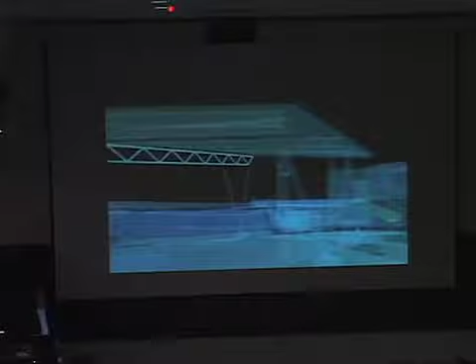This was an animation that we built in 1984. It was for the North Carolina Museum of Art. It was very, very early, at the beginning of computers, and actually takes you through a project that we later built. But I want you to notice that the actual film is mapped on the surface of the projection screen in North Carolina.

See, this is too complicated for me. Gotta go here.

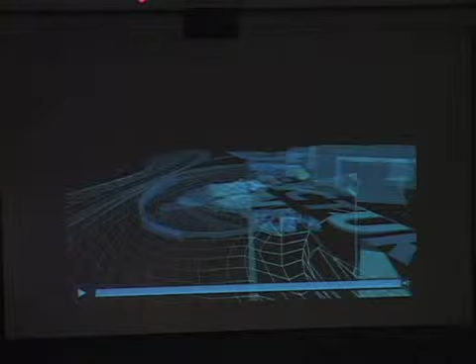Our office is downtown in Soho. We understand it to be a studio for the investigation of architectural design and production. The plus sign added to our initials, SMH for Smith Miller plus Hawkinson, purposely alludes to the collaborative nature of our practice. Our studio is a long and narrow loft, actually once two buildings, built just after the Civil War and joined sometime in the 30s.

The open plan supports all sorts of activities: model building, full-scale mock-ups, conferences, and solitary work. There are 3 libraries: theory and history, product research, and publications relating to our work.

I've got to figure out how to make this thing work here.

We thought to categorize our work in terms of human endeavors, as in live and work, work and learn, and play and connect.

Under live, I present West 53rd Street. I saw some work that dealt with housing today. It was very interesting. A low-rise, high-density, multi-unit condominium in Midtown. Our house at Sagaponack, a not-so-typical suburban single-family house, and 2 projects for historic landmarks districts: an ex-urban house for a famous architectural theorist, Ken Frampton, and 2 loft interiors.

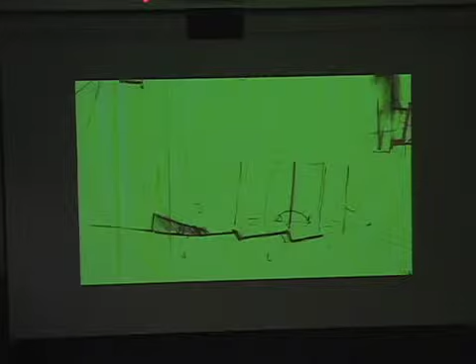This is kind of interesting. I'm going to get off the computer and start looking at the slides.

Basically, we were looking at housing in the city of New York, and we discovered that there was a precedent in the form of the Brooklyn townhouse with a grand stair, we call it a brownstone. The stair goes up the main floor, but we noticed there was a second type, where the building was recessed from the street, and there was a courtyard in front. Later, in the Upper East Side, we discovered that some of those types had been modified to remove the grand stair, but the sort of courtyard remained in front.

And then we found Philip Johnson at work doing a virtual courtyard. That is a completely flat facade with a brick wall and a wooden door that actually enters directly into a two-story townhouse. On the other side, the back side, where the garden is, actually it's the same arrangement, but he flattened the facade.

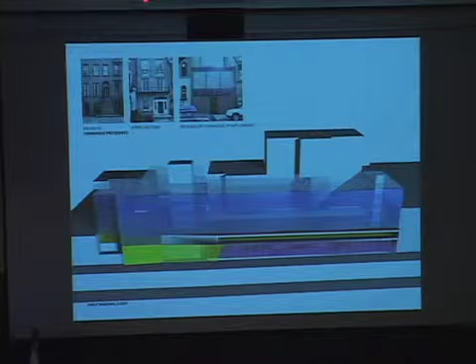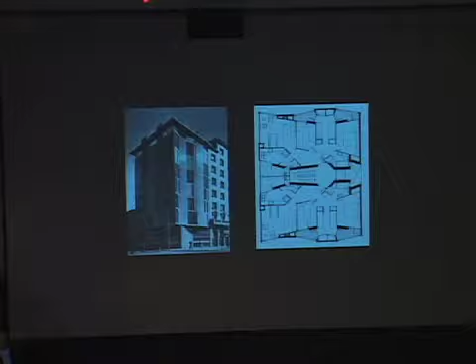In this building we used a glass wall to do similar things. Wait, hold on, I've got to do something here and there.

So we made all our own kinds of animations to describe the effect of walking down the street and seeing how the actual building would appear from north, south, east, and west.

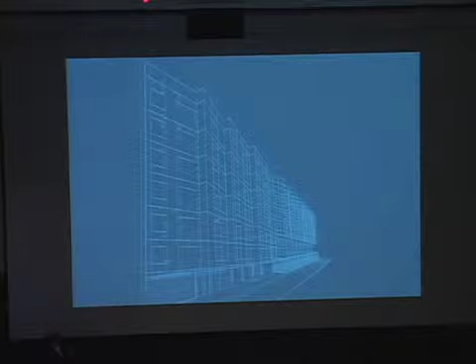Early wireframe perspective shows some very interesting beginnings. This is the folded facade, kind of like Aalto's work. At the bottom you can see the townhouses or maisonettes are pushed into the building with a ground floor of courtyards and spaces. There's a main entrance here for cars, shared, and also for people coming into the apartment tower.

In the model, we began to look at this as a kind of screen. We were trying to figure out what to do with the ground floor, because there was no precedent for that in New York City.

These diagrams attempt to identify the simplex tower and the maisonettes, which have duplexes that run through, plugged together like this. We found there was a tremendous variety of units within this 6 or 7 story high building.

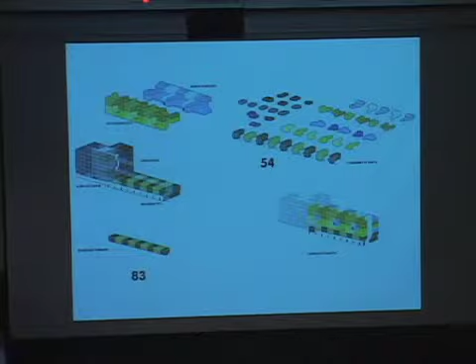This is one of my favorite drawings—please don't look at the people. Basically, there's an entrance at grade. This is the maisonette that runs to a rear yard garden. Downstairs is parking, so when you come in, you go upstairs to your maisonette and the bedrooms.

The key thing is we managed, in a 7-story building, to have only 2 common corridors. These are the famous skip-stop corridors, where you come in off the corridor, go upstairs to a bedroom floor that runs all the way through, and vice versa. So I don't pretend to be a green architect, but this building actually has cross ventilation on every floor, and it's incredibly efficient.

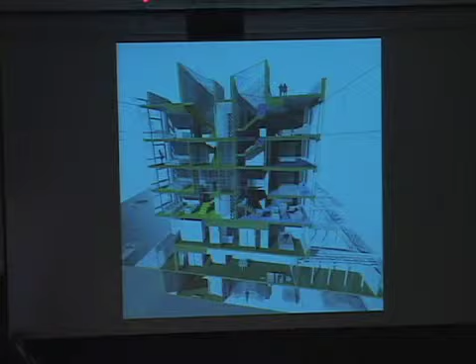This is my favorite thing, but I've got to figure out how to make it work.

The marketing people decided to try to unpack our building, so they made an animation of all these pieces coming apart. It was never really finished because they realized it probably wouldn't be understood very well by the public that was going to buy the building.

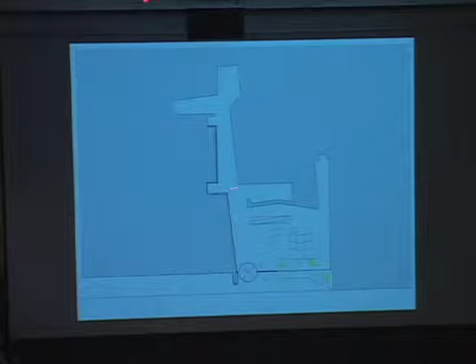The interior is important to us. This is actually the lobby, and you'll notice that all the oblique surfaces make it very hard to understand how deep or how wide or the real size of the space you're in. It produces a kind of slipping and sliding that gives tremendous animation to the volume of the space.

It was in Architectural Record. We just put these up because you can see that the bedrooms are joined—the bedroom joins the living room behind this common skin.

The other item was, I was very concerned about people occupying residential buildings in New York City, and these are actually square parallel-projected sash windows that are opened by the individuals in the building, which animates the facade much like in a pixelated fashion to give it life.

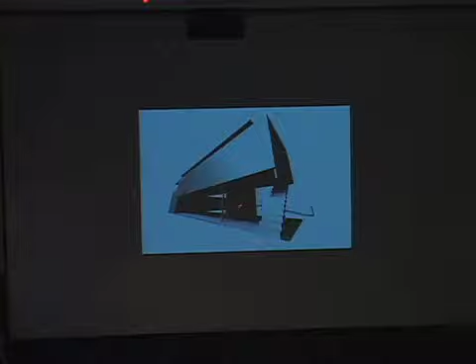Actually, it's a deconstructed house with stairs going up to the roof. There's a little piece of roof here, a big window, and so on. Well, we were thinking in similar terms of having a stair, a solid wall to protect you from the street.

And other aspects of this house as a kind of deconstructed dwelling. In fact, from the street, the bedrooms, which are behind this wall, there's a corridor, have no view to the south. They pick up skylights. There is a common room upstairs where the owner has a study, so he or she can look down at the front yard. And oh yes, there's this weird courtyard and wall which protects the interior court from being seen from the street.

The project reverses itself and becomes almost all glass into the courtyard, which has a swimming pool. And the glass upstairs actually is full height from the bedrooms. There is a balcony out here that obscures the view as you're looking up. So just as the spandrel worked on the 53rd Street project, we're using architectural elements to condition the windows.

We were asked to do a very small building made out of brick for a developer in a historic landmark district.

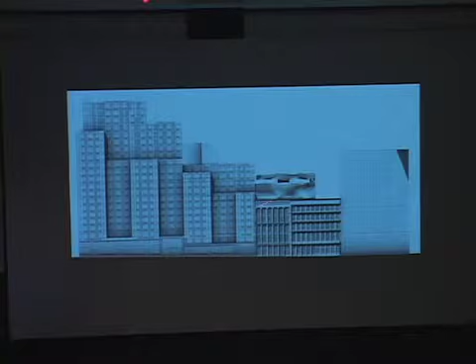And we had a commission. This guy owned 1.5 buildings on Leonard Street, right next to the Herzog and de Meuron Tower that got stopped. And so he realized that by code he could put more building volume on top of this building. So I had this really interesting problem of proportion and scale.

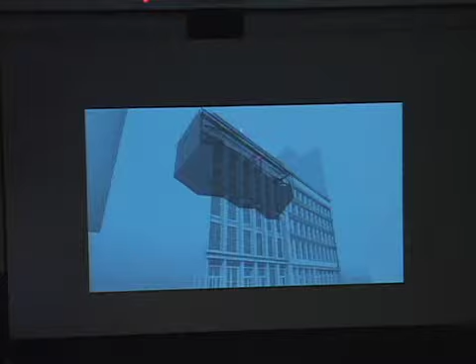We began to think about how we had to make drawings that showed you how much you would see from the street, because the Landmarks Commission thinks about that. So we made drawings where actually the new addition is sitting right on top and is transparent, and you can see both at the same time.

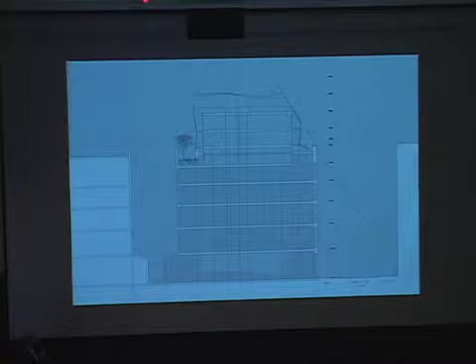We discovered that there was another part of the law which allows people to have balconies and escape routes that are not considered building volume, but can be inhabited. And so this became a kind of scrim that wrapped around the top of the building and the sides. It formed a kind of rock when you looked at it from the street.

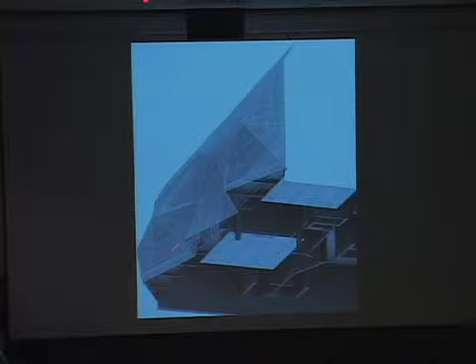We began to study folded screens to see about relative densities, and then finally came up with a scheme. This is looking up through the bottom of the apartment and seeing these spaces. This is its final portrait. It was approved 100% by the City of New York and not built.

And there was a house actually down on the right over here that we didn't like, so Ken and I took a large ladder and put it on the site. I held the ladder and he got up high and he decided where we should put the house exactly.

Speculative projects and urban design. This is a neoclassical, actually 1927 brick building, and we were asked to build a tower on top of it. This is what it looks like.

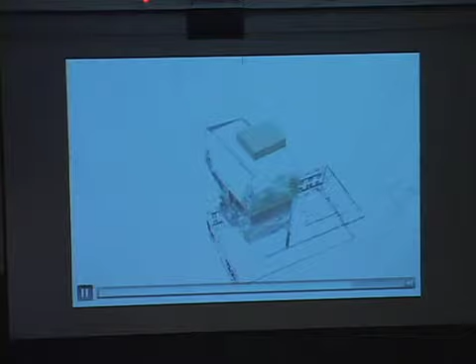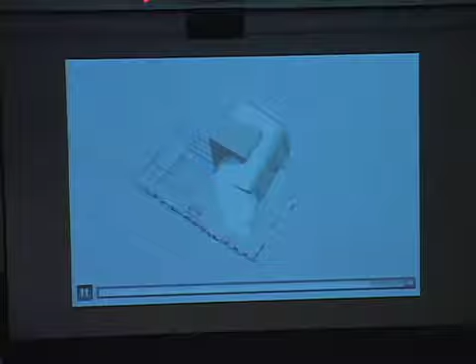As you can see in this detailed animation, the building only exists in its reflection, and the rest of the city isn't there at all, is it? So we temper our presentation to match our theoretical premise, and actually we do that with real buildings.

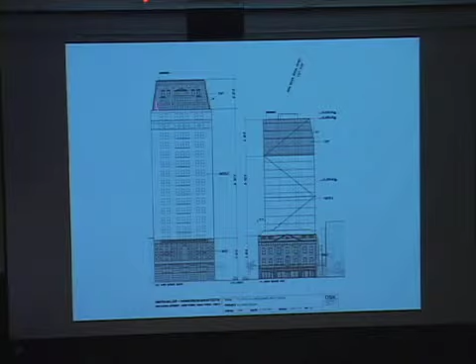Proportion. This is the neighboring building, the W Hotel. We found all kinds of remarkable similarities between the existing neoclassical building and our reinterpretation.

In Soho, we completed a whole building from the ground up, only to have it stop because of the economy. It was very tall. We've done work in Telluride, Colorado, and worked in different places under different situations.

This is a project on the East River, part of which has been built. The actual drawing is an addition to the top of an existing hospital and a physician's tower on top of the FDR Drive.

One of the things I was keenly interested in is the kind of architecture that goes on at the edge of the city island and the large span that happens, for example, at the Queensboro Bridge, which also happens with regard to our addition.

So I brought this kind of very large architectural effort to go across the FDR Drive with bridges and so on.

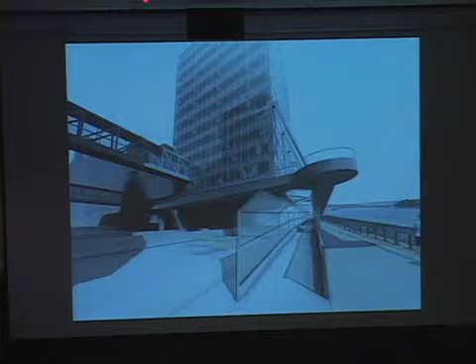The skin of this building, because it was facing east, we worked with Buro Happold to make sure—having spent 3 days in this hospital having my hips fixed, I was keenly aware of what happens at 4:30 in the morning when the sun comes up in your eyes. So I put a scrim on the outside of the building to mediate the east sun in the morning.

This is the project as it will be completed. This is an existing building, and this is an addition. Basically, we weren't allowed to cross the street.

As Amanda Burden is very interested in keeping the streets open to the rivers, we carried the frieze or the cornice across the top and down the side and over.

Fortunately, in the existing plan, this was what we call a skin job. Somebody else had already done the plan of the building. They hired us to get by the planning commission. So by maintaining a kind of continuity across both buildings, we actually bridged the street.

Corning—some of you have been there. This is actually a project that's more about looking from the inside to the outside. We thought the landscape was actually part of the exhibit. There are lots of luscious materials.

In this case, we had a big shutter at the end of the theater that went up and down, so as people went up the ramp and came down and got ready to watch the film, the next group of people ready to go in would see those other people going in, and the audience, actor reversal would take place.

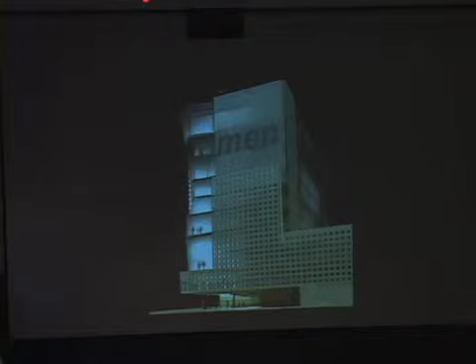In Lower Manhattan, we won an international competition for a women's museum. We're very interested actually in the relationship of what portion of our site actually was visible by Lady Liberty.

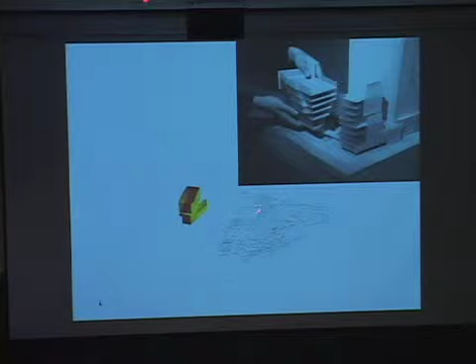And we found a volume within the building site where all those rooms would be united or tied to the Statue of Liberty. Needless to say, that project didn't go ahead either.

This is in North Carolina. This is where we actually put culture on the outside of a building. We made an amphitheater, a performing arts space that mirrored the Eurocentric European collection that was inside the Ed Stone building. Tom Phifer has since made an addition to that.

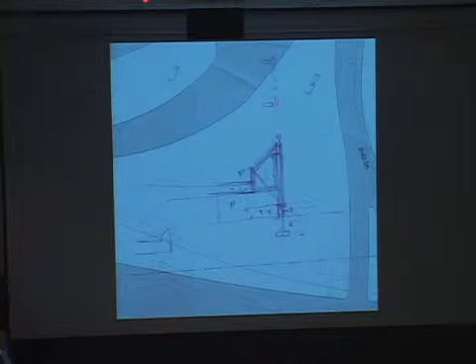This is a sketch of the north wall of the building, seemingly in glass, and there are some key parts to this. There's a skylight behind the glass facade that picks up the southern sun. So the sun comes from the south, strikes the back of the north-facing glass, and illuminates the entire thing, including somebody sitting here at a desk.

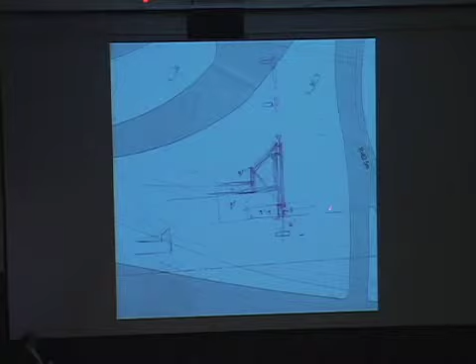The integration of the environment, solar, furniture design, foundations, structure - it's all in that sketch, and later turned into a real project. To convey that idea, of course, we had to use things like 3ds Max to figure out how to show the federal government and Homeland Security how delightful this would be.

Well, they weren't very much concerned about delight. We produced very large drawings showing the different roadways.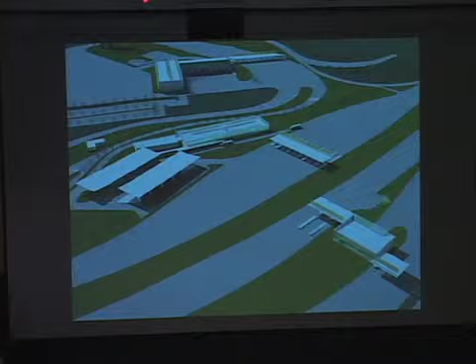This is one of the most telling slides I have - I found it this morning about 2 o'clock. This is the existing facade designed by an architect from Florida, facing north, barely legible. Here's the new replacement facade with the sunlight coming from the southwest through the back and orchestrating the channel glass.

Combination of lightness and nomadic structure, canopy, and different materials, all alluding to kind of the architecture of the roadway.

We thought originally that these canopies would have to be brought to the site and the site would have to stay running 24/7. So we actually designed them systematically so that initially there would be only two like chopsticks holding up this great big folded steel plate, which is itself structural.

There are ship-making facilities in the St. Lawrence Seaway who are able to bend large Richard Serra-like plates. So this is actually figured out to fit on the back of a 18-wheeler on the diagonal.

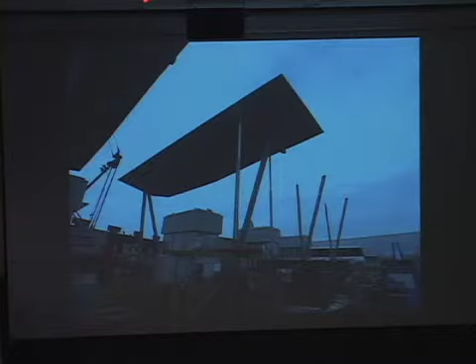I like the kind of anthropomorphic push, pull, the sense of the bones of this working. There's this difference in scale between the entrance for the human going through the skin and, of course, big, large trucks going through the canopy.

This was an enormous project for such a small office. I think we did it with about 12 people. You know, it's 10 or 15 acres and millions of dollars.

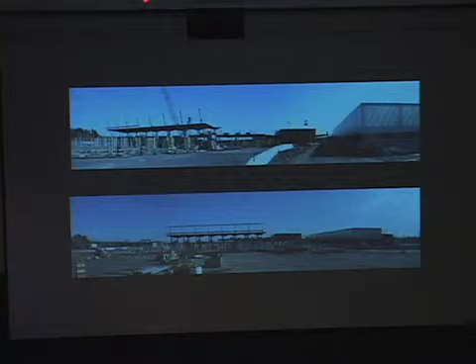There is a certain lightness and a little sharpness to, oh, here we go. The guy who flew this plane with us, unfortunately, died. But, where's the little button? There it is. Get ready.

I've never shown this before because I couldn't figure out how to get it on my laptop. This gives you an idea, unlike a fancy photograph from the ground, about the complexity of what's going on in the border station and the orchestration of movement. In a minute, this is the passenger inspection, that's the building with the glass in it, and this is the X-ray building. You can begin to see cars moving around, and in a moment you'll see a truck heading up to go through the commercial facility. There he is.

Architects, what you're doing in school here, you can continue to do wherever you work. I find it amazing that 6 or 7 people in our office were able to figure out how to do this, make all the drawings, supervise the construction, and actually get an airplane to take the pictures.

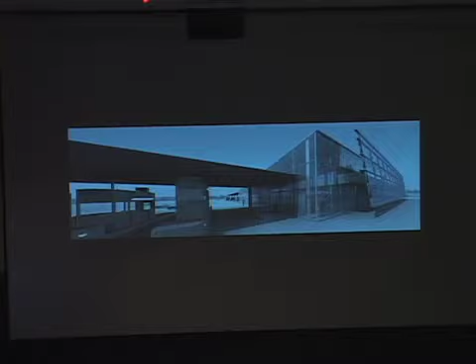We began to think about this glass again. Here's an early sketch where you can see the glass facing north again, trying to get light from behind. These were not successful—there were all kinds of conflicts about how this operates. You'll see there's a truss over here, and this sort of T-shaped organization.

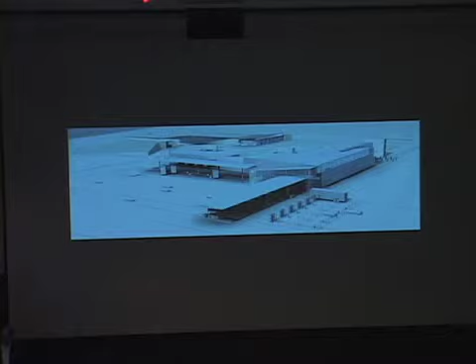The happiest part of this project was the earth berms. We began to realize, because this was a recovered site, it's dirty earth—brownfield.

So we thought, okay, we will use the brownfield, and we thought about it at night because of the 24/7 operations and daytime. We actually made a little animation, going there and doing stop frame, to see what happened when it went from day to night. I don't know whether that's successful or not—it's a little too fast, but we were thinking in those terms.

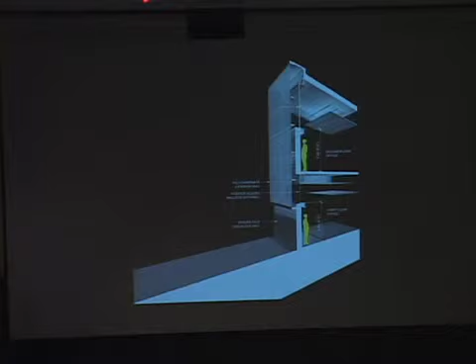Ancillary buildings. This one came after the first one, which was all glass. As you can see, the yellow people here are in peril of being shot, so they're behind block walls. But there's a scrim that works over this polycarbonate facade and produces the sense of transparency which we were interested in maintaining.

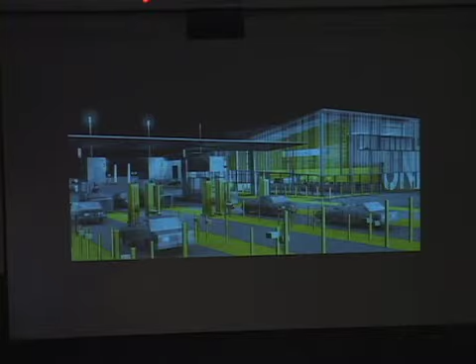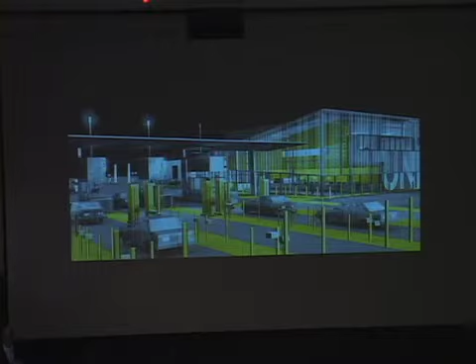We also thought about the color yellow. Being at the border, there are these areas of the pavement that are painted yellow—areas where you shouldn't really go, but you can in case of emergency. So they're areas in the margins. It's kind of a language people recognize on the highway. So we brought the color yellow inside the building so people could use the color to direct them as they go through. Supposing you get out of your car and you only speak Quebecois, and the guard talking to you is speaking English—he can get you at least to where you go by using color.

Translucency and transparency—we are very interested in this. This is the penultimate project I think I'm going to show you, where we were developing a kind of building skin that had a very high R value, yet allowed light through it. This is a polycarbonate extrusion that's used in factories.

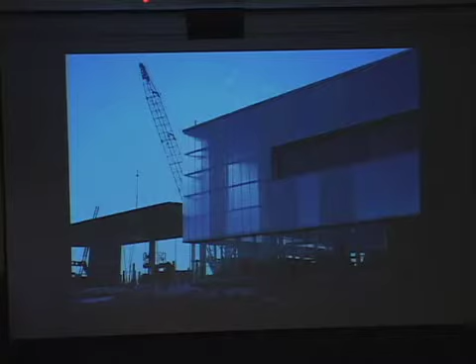In this case, we use this material to bring light through again. So here's the presence of yellow. And we made an incredibly thin canopy to give you a sense of lightness, contrasting the thinness of the canopy.

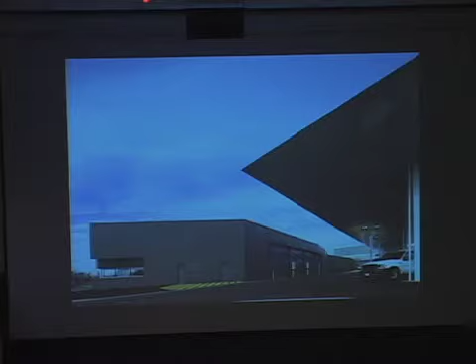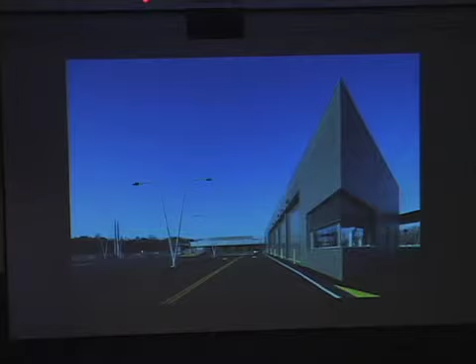Remember the brick project in Brooklyn? We are beginning to think about durable, opaque surfaces in their orchestration. There are no sidewalks—we actually produced areas of safety for pedestrians through color and a change of material, from solid asphalt to a kind of rubber gravel, which is permeable. This is a real photograph. The building does come to a point.

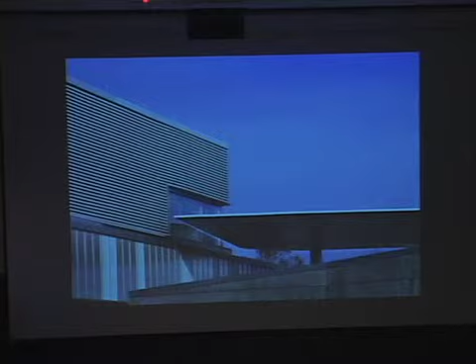This is a very thin canopy. Materials - you mentioned detail. You don't get to see much detail when you look in an architectural magazine, or if you wander around the city and can't get close to a building. The buildings are made out of things, and we thought about this sharp edge of the canopy coming close to the building's eye, which is from Un Chien Andalou, the movie. This is it.

So I kind of like that noise, you know? It sounds like war.

So this is flying around and looking at the back of the building. What works amazingly is that this whole operation works not only with General Motors over here, but a major bridge to Canada. We organized the building so it could supervise and oversee all the different operations of trucks, pedestrians, and automotive cars coming in.

As I said, the guy that flew this airplane crashed about two months ago, but I thought I'd mention what a wonderful pilot he was when we flew with him. He instructed the border guards on how to fly their own airplanes.

Then I was in Maine, and I was just kicking around. Can you hear this? I don't know the speakers in this thing. And I turned on the TV. Can you hear that?

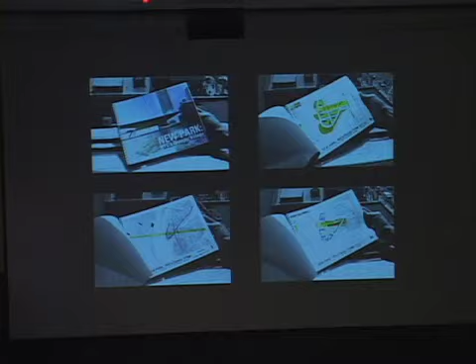Okay, other public spaces - this is Lower Manhattan, Louise Nevelson. We started at the same time the World Trade Center site started, and we finished first. We made some benches that were light fixtures, just tiny details, so you can sit on them at night and not trip on the benches. We also did a plan for the Olympics and a ferry station in Lower Manhattan.

My partner, Laurie Hawkinson, is not here. This is a piece she did in the early 90s called the Freedom of Expression National Monument. You can probably figure out that we are fairly politically motivated. This was built on Battery Park City before Battery Park City was made, and the cone actually aimed at Wall Street. It seems things are coming back - people are now screaming at Wall Street again.

The final project, which is not in my CV that I want to show you, is actually something about to start construction. It's a small building that houses ambulances, part of the fire department in the city of New York. This is a derelict part of the Bronx. Interesting enough, this looks like a garbage dump, but it isn't - it's a little garden, a community garden. There's one house left over, and there's a bunch of projects nearby that look down on the site.

There were various constraints which led to a most peculiar configuration of the building. And because people would be looking down on it, we replaced the roof with a green roof and a cistern to collect the water.

The motivation of this particular project to be built or designed in the city of New York was to give hope to some of these communities in the Bronx that are really bereft of support services. And it was a difficult situation - the fact that we were taking a strip of the community garden away and replacing it with an ambulance facility.

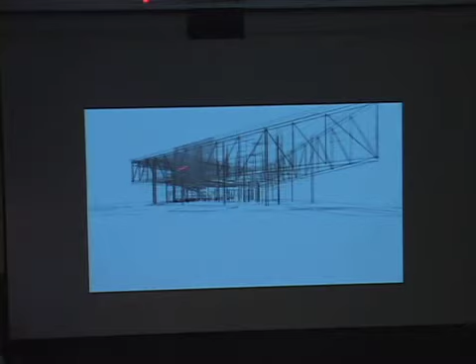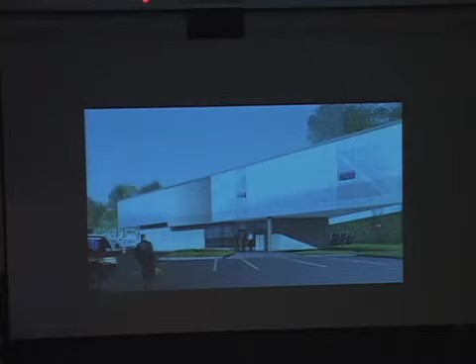We used all kinds of drawings to think about transparency and the spaces underneath the edges, which you'll see in a minute. The same polycarbonate is used, and the project actually floats above the center portion. There's even a place for picnics. Illumination at night, transparency. We're very proud of this little project.

There were 28 projects in New York City, part of the DDC's program to improve the city. Young architects were doing them. Only 2 survived. This is one of them, because of the cutbacks.

We make drawings all the time to try to convey how this fits in the city, and you notice this is very carefully worked out to see the inner bays, the spaces here. It allows the viewer to get himself or herself into the project, to appreciate the plan, the section, the elevation, the materials, and the lighting all at once. So it's not actually a representational photograph rendering, but a constructed point of view.

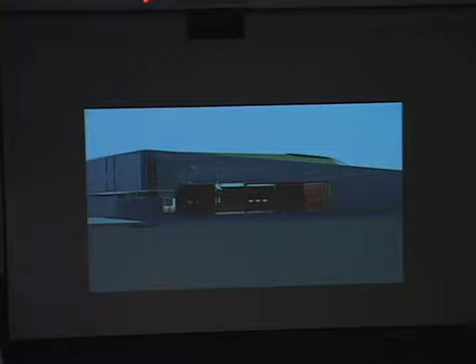So this is my last slide. I'm going to stop, and if you have any questions, I'd be happy to answer them. Thank you.

There are never any questions. I'll open with a question over here. I was just wondering, as far as the design process is concerned, because there seems to be such a rich attention to details and the effects of different materials, is that part of the generative process up front, or does that happen later, or how do you work at those different scales of engagement?

Oh, I am a firm believer in daylight. We pass most of our time, as you do, in this terrific building, which is full of light and action and material sensibility, isn't it? At the onset, I can't just envision a project being material-less or light-less. It's a constant battle for us to introduce daylight, and the daylight coming from the south to the north - there are very few actual daylight hours at the Canadian border. It's a different latitude, longitude.